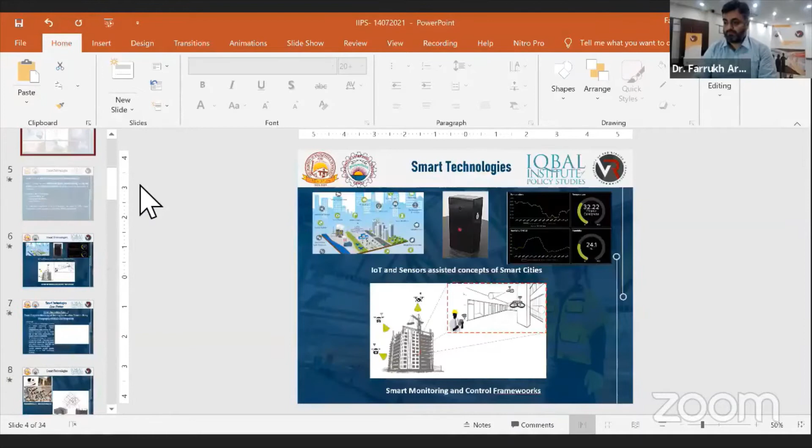This is a small brief outline of what I'm going to discuss today. I'm not here to teach, because I assume much of our audience is pretty much aware of what we mean by disruptive technologies. But I specifically focus on my title, which is smart and immersive technologies in case of disruptive technologies, and their scope or future dimensions in the construction industry of Pakistan.

Primarily, what I'm going to discuss is all those things which we have already done or are under development through different R&D projects and industrial projects. So I will briefly talk about disruptive technologies, then smart technologies, and then a few case studies we have conducted with respect to application of smart technologies, immersive technologies and their application, and a little bit of framework guidelines, much of which Dr. Lodi and General Harun have already discussed in their introduction. So when we talk about disruptive technology, this idea is driven from disruptive innovation.

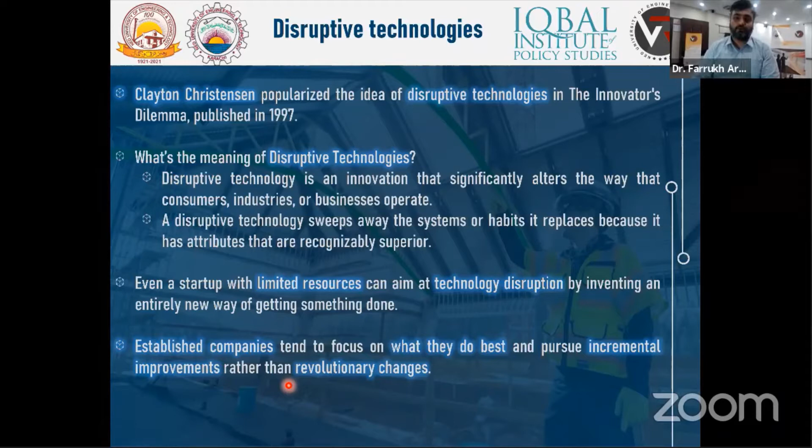Now, that has resulted in revolutionary changes in the market. And that is why we see the rise of ICT and the use of ICT in general, and in particular, sharing-based mechanisms all around the world, whether it be construction industry or any other industry.

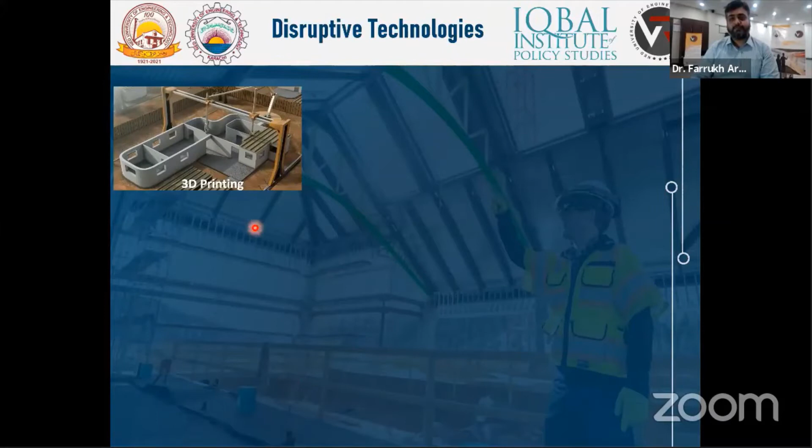Sharing, by sharing I mean sharing information, of course. Typically, the disruptive technologies, if we relate those to construction industry, the ones that are classified, there are nine or ten different technologies which are classified as being disruptive technologies for construction industry, starting with 3D printing, virtual reality, robotics and automation, artificial intelligence, because whatever data you collect, you need to process it to minimize the errors. So artificial intelligence, machine learning, use of drones or UAVs, unmanned aerial systems or aerial vehicles, 5G technology, which is already incorporated in many countries who have developed it advancedly, like US, China, but it would be at our doorstep, it's almost at our doorstep as well.

Cybersecurity development. So when you work in IoT, when you work in ICT, a lot of cybersecurity issues also arise. And hence, to cope up with those issues, there have been significant development in cybersecurity as well. Augmented reality and IoT applications, as I discussed. So these nine technologies are typically classified or categorized as being the disruptive technologies when it comes to construction business or construction industry.

Now, when we specifically talk about smart technologies, which is one part of my presentation today, the word smart is typically termed as self-monitoring, analysis, and reporting technology. So anything that ensures self-monitoring, any technology rather that ensures self-monitoring, that enables analysis by the data that is collected through that self-monitoring, and also reports, and even further, when you integrate that with artificial intelligence, providing you with solutions, would be termed as smart technology.

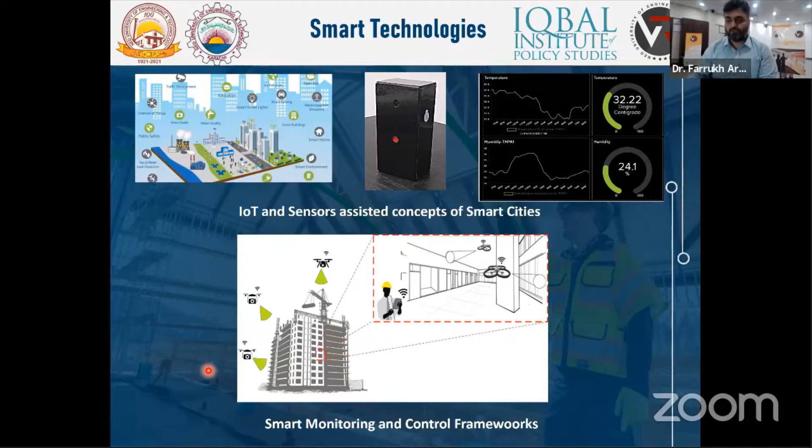Now, let us go through the first case study. This is one of our projects, already published work, in which we developed smart progress monitoring of building construction elements using an integration of videography, MATLAB for data processing and training of data, and BIM, building information modeling integration. Now, the concept was that although there are different technologies available for smart monitoring, like laser scanning, like drones, sometimes these technologies may have a wider cost impact on construction companies, and hence they may refrain from adopting such a change.

It's not that the industry or professionals might not be open to change, but when it comes down to the adaptation of such technologies, its cost side, and its human resource capability development side, they may refrain from it, and might look for traditional ways or low cost mechanisms. It is very important that when you introduce disruptive technologies into any industry, specifically in developing countries and developing industries like Pakistan, cost is one of the biggest arguments to justify acquiring or developing a technology, since implementing it on a construction site directly relates to business profits and competitiveness in our industry, which is typically a competitive bidding based industry.

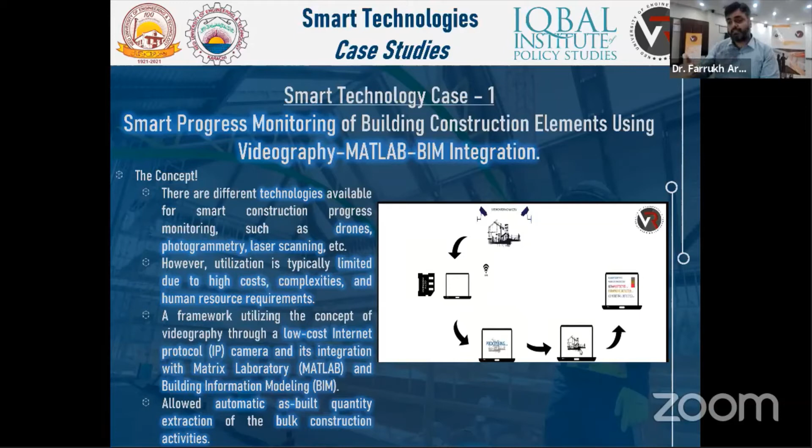So in a nutshell, the integrated framework works like this: the camera provides feeds that are transmitted to our workstations at a lab, and those feeds are processed through the MATLAB integration to provide progress reports as well as phase detection of what has happened. So it provides better visualization and better progress monitoring.

So if we move on, for example, this is a case that we implemented at one of the academic buildings at NED University. We worked with a single camera, a simple IP camera available at very cheap cost, maybe between 3,000 to 5,000 rupees, even cheaper. This 360 camera is installed on site at this location. You have to calibrate the site, of course, for the elements that are to be monitored.

We basically monitored 3 elements that included the vertical member, that is column, beams, and block masonry. We call them bulk activities. The camera is installed, calibration for the camera and its pixels is done, and then accordingly, if you look at the plan, this is the whole building plan. We marked and calibrated the grids with the already developed as-planned BIM model.

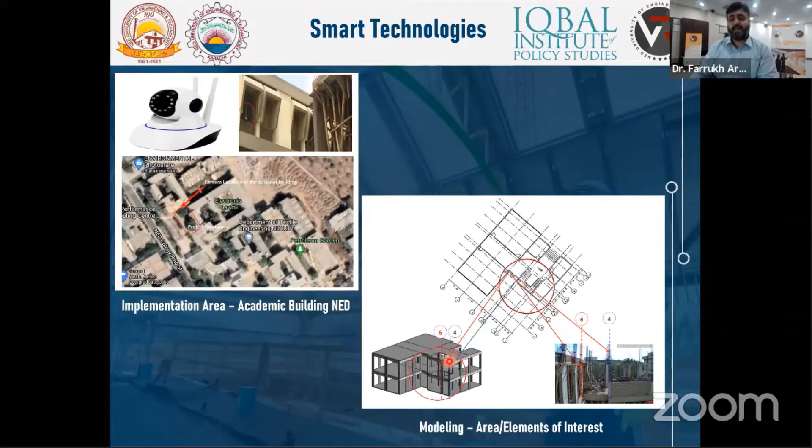Once that is developed, this MATLAB interface is designed where the live feed could be incorporated, and the live feed comes in the form of either a picture or video, and accordingly that live feed automatically starts giving us phase detection in the form of colors. So yellow, blue, and green basically reflect different elements such as formwork with respect to its color coding and concreting that has been done. So it provides a visualization.

But the more important point is that we can analyze this data set by drawing different regions. For example, this picture is converted into grayscale mode. Then we basically select our region of interest, which is isolated in the analyzer from the picture that has been got through the feed, and it gives us the quantity, with respect to the calibration, of how much work has been done.

Then, because we already have an as-planned model in a building information modeling platform, we can compare what was planned with what has actually been done on the site. This provides us as-planned versus as-built volumes, and accordingly, the percentage of work that has been completed.

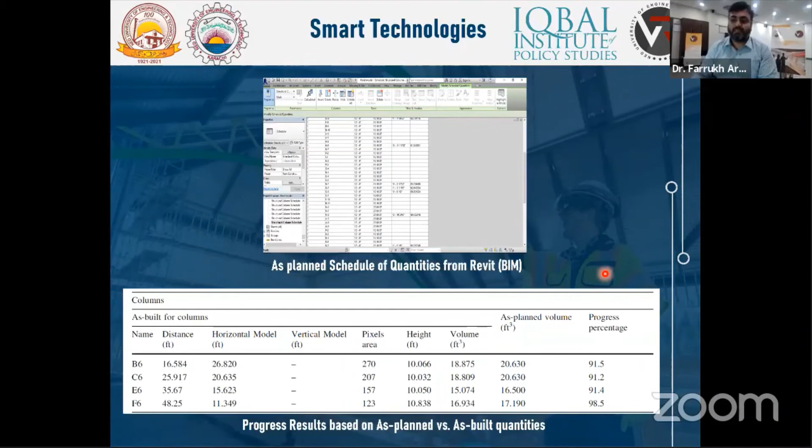The advantage of this whole system is that when we take live feed through video cameras through this IP protocol, there are lesser chances of getting erroneous data. When we get it through human resources, they might have errors or compromise on the measurements, and hence the actual progress might not have been reported. Secondly, it's a field and head office integrated framework, which provides greater flexibility in monitoring a site.

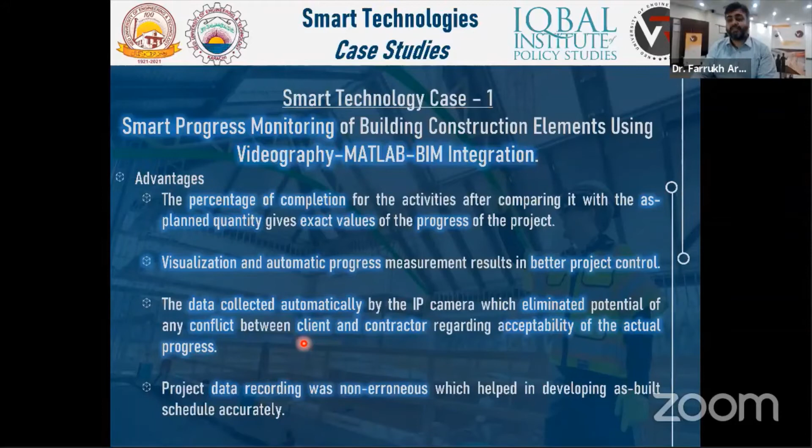The data collected through this camera is evidence-based data, so it would reduce or avoid any conflicts that may arise in the billing phase of the project. When monitoring the site, there are multiple other analyses we might be able to do. So data collection and error-free data collection is key to this technology.

Another point is that sometimes we're hindered by human resource availability or capacity to incorporate technology into our environment. So another idea was to progress-monitor with whatever human resources are available at the site. A surveyor is typically present on site, so the idea was how can we do productivity tracking of construction work using that.

What we did was utilize the already available surveyor on site and the normal total station, which could give us geodetic points. Those points could be utilized through building face surveys and for developing as-built, data-driven models in a building information modeling environment. This study was implemented at our business incubation center when it was under construction a couple of years ago, and this whole framework was applied onto that building.

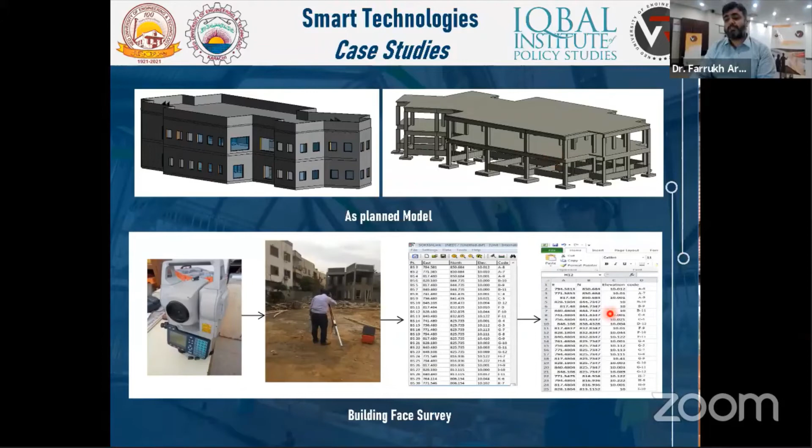The as-planned model in BIM, whether structural or architectural, was developed. Then a normal total station was used to perform a building face survey, through which geodetic coordinates were gathered, and CSV files were produced. These files were uploaded to the cloud from the site, which isn't an issue nowadays with Wi-Fi technology.

The cloud-based data was then programmed for generating data-driven as-built models through Python programming, supported by different packages in BIM platforms. You can see there are progressive updates for columns, slabs, and block masonry - the bulk activities for the building. These progressive updates provide the as-built model in Revit using the surveyed data, which was transformed through the cloud.

So survey-cloud-BIM integration, with the advent of cloud technology and Wi-Fi availability, can very accurately transform raw survey data - which were just numbers a few years ago - into a data-driven 3D model. For example, this is a whole building, and you can generate the whole building's as-built model in 3D as well, and with that the data could be analyzed for productivity tracking.

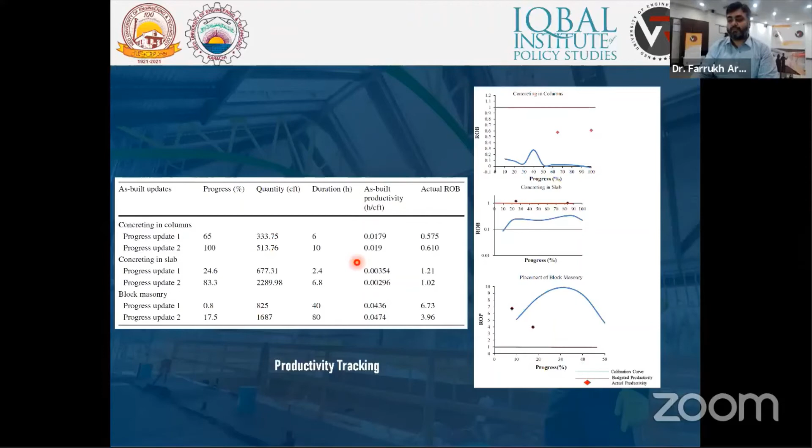These are certain productivity curves. This blue curve shows typical industry productivity data for concreting of slabs. According to our planning, the red line shows the productivity benchmark in the graph, and we can monitor productivity data by taking the schedule of quantities from BIM for the data-driven models generated, comparing it with the as-planned model that was already there.

This technology would not require small to medium-sized construction companies to incorporate a lot of new things onto their sites or into their office. What they need is human resource training, but the simple surveyor already on site can now provide a lot of valuable data, which can be utilized for monitoring the progress of the construction project.

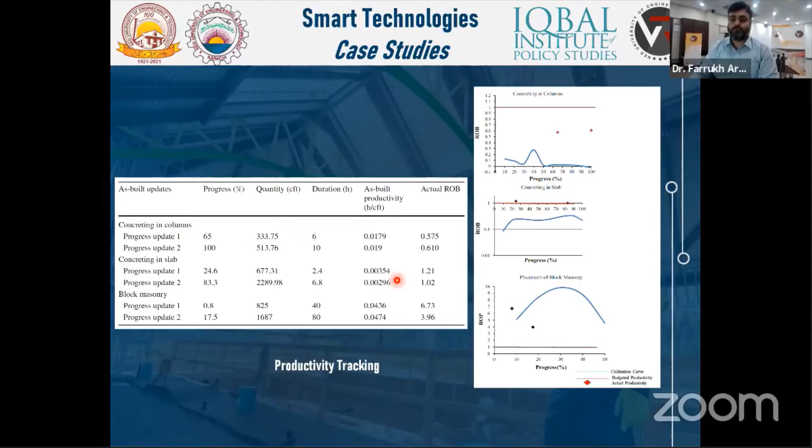Now, advantages - as I already discussed, one thing I'd like to mention quickly is IoT based. We're working on a project funded through HEC, in which we're developing guidelines for energy efficient housing. What we understood was that it's not just about having the bill data - energy bills data, electricity, water and gas - to analyze. Simulation alone is not enough either.

We need to incorporate the habits of the people living in that house. For that reason, we designed certain sensors which monitor different energy performance aspects of a house. We incorporate these sensors into the house for 15 to 30 days, from where we get live data in the form of graphs and charts, which we analyze and compare with simulation results. This incorporates what we call the living lab concept, utilizing IoT sensors that provide data to the cloud, which we analyze to improve the energy performance of a house, incorporating the habits specific to buildings currently in use. This is one of the key areas of disruptive technology in the construction industry.

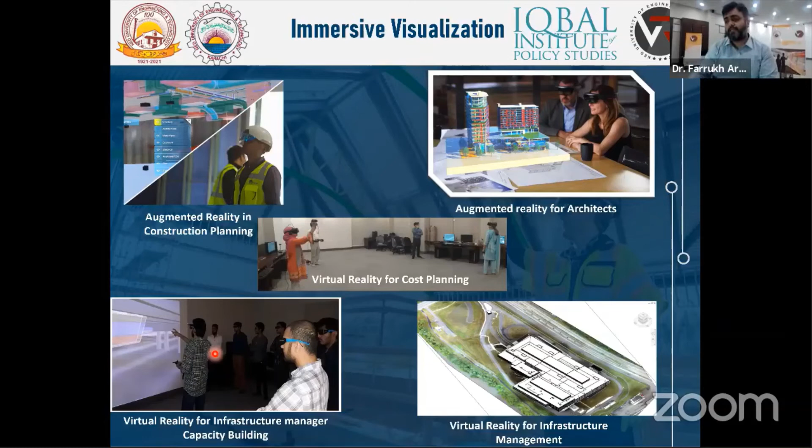Let me quickly go through what we have done. This is one project we did with an American company, in which we integrated drone-based data with laser scanning data, and integrated this visualization with the BIM model into virtual reality. We presented it to CTDOT, this project was in Connecticut. The whole framework was this. We worked with AI Engineers USA on this project, who took our help in developing the integrated visualization. The basic idea is that drone-based data, laser scanning data, and building information modeling data provide different dimensions to an infrastructure facility.

If we can integrate those into virtual reality, it can help us with better visualization, better as-built model generation, better decision making, and inspection in the future. For example, this was a Connecticut Waterbury bus storage area, almost 400,000 square feet, a 2-story facility on 30 acres. The AI Engineers were responsible for planning, monitoring, and management of this project.

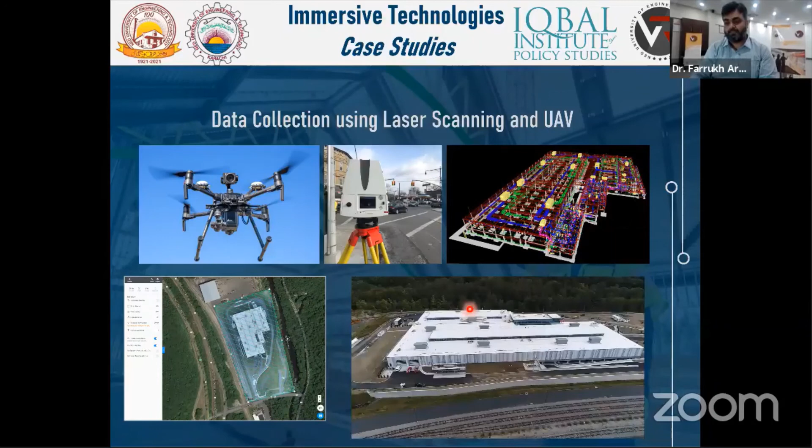Our partners utilized drones, they are very well versed, and laser scanning data to generate different models. You see this drone video at the bottom, reflecting one of the flights. There are many routines in utilizing UAV-based data collection, and then laser scanning data was collected.

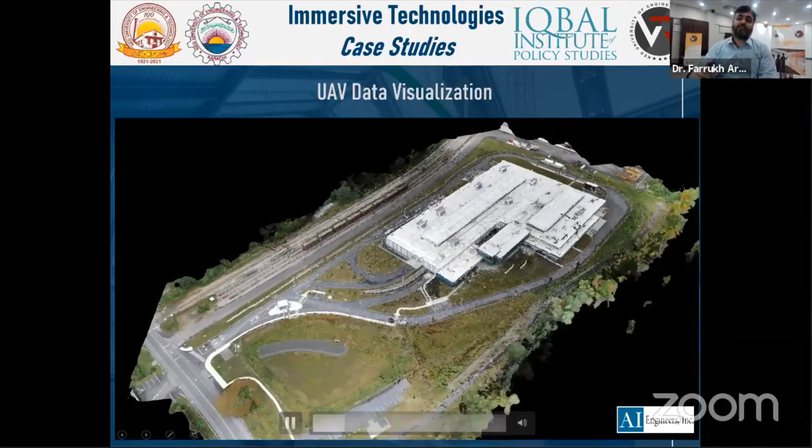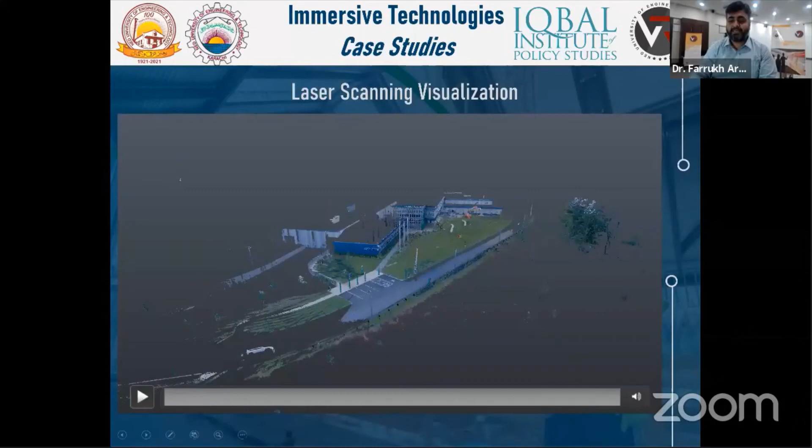This is the laser scan model of the same facility, you can see the accuracy of laser scanning. This is the UAV visualization, and a number of point cloud data was generated out of the UAV data collection using drones. Thereafter, laser scanning was performed mainly to look at the inside of the building or the detailed features, and this is the laser scan data model for that facility.

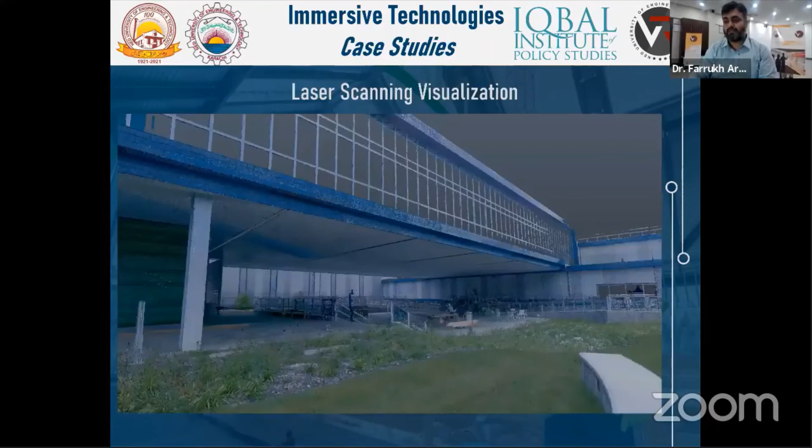After this, we had the data set in terms of drawings for the as-planned model, so we developed the BIM model as well, the as-planned model. Now we had three data sets: BIM-based data visualization, UAV-based data visualization, and laser scanning-based data visualization. Laser scanning is very good for as-built.

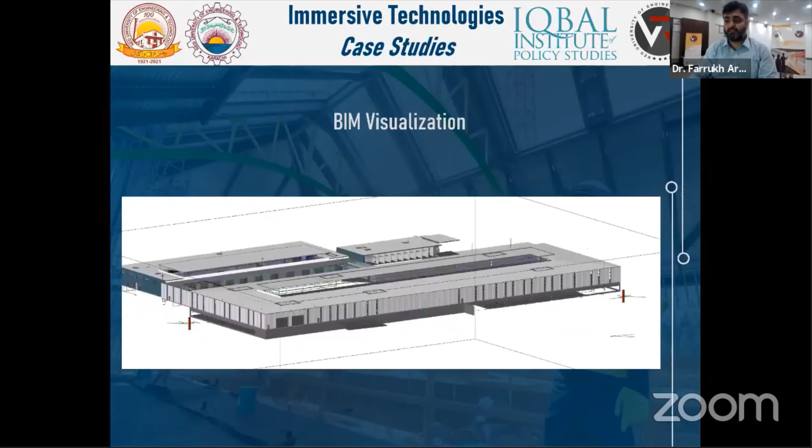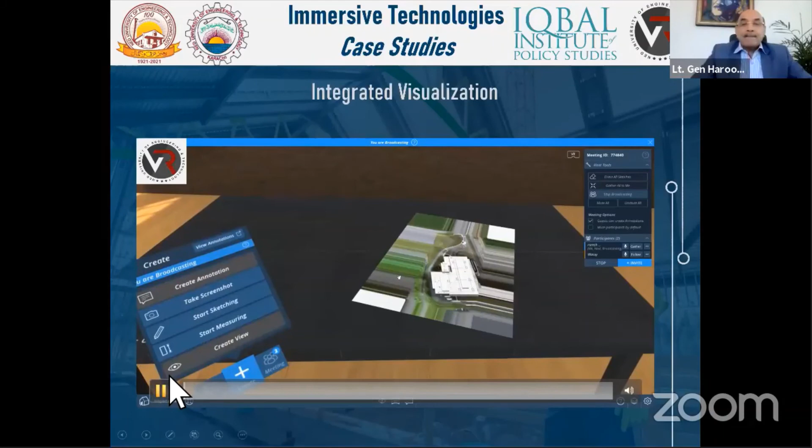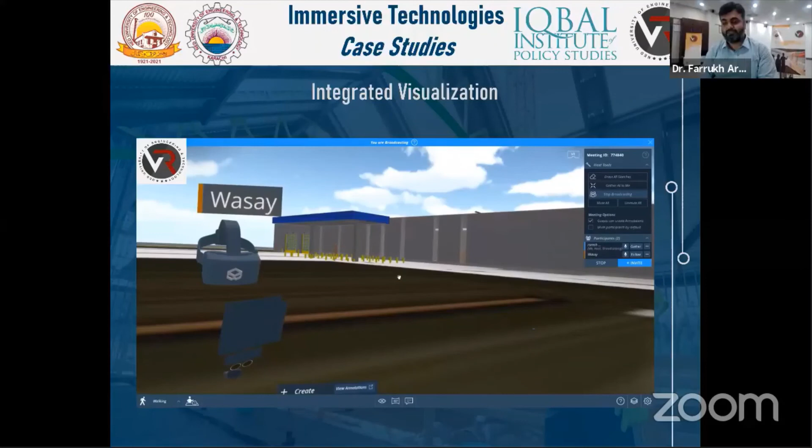So what we did was we were able to integrate it for integrated visualization as well as decision making. This is a screen recording of one of the sessions. I wish I could have shown you it in virtual or augmented reality. But you can see that measurements could be done of the site. The outside of the site was UAV-based data, and decisions could be made in this model in virtual reality. At the moment, two personnel were integrated, talking about different decision parameters and measuring.

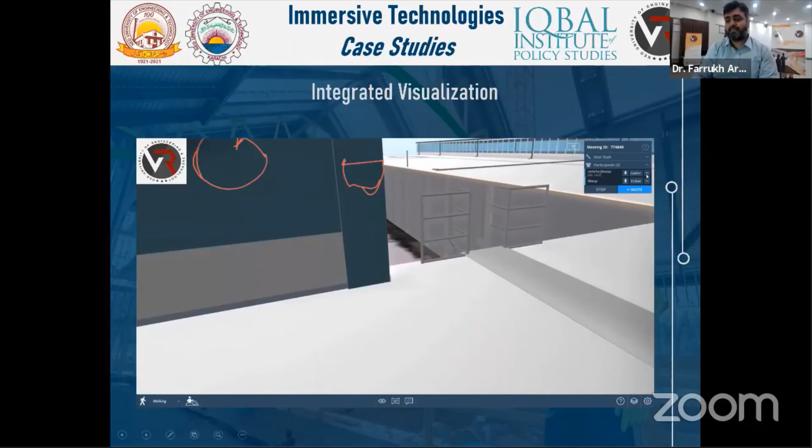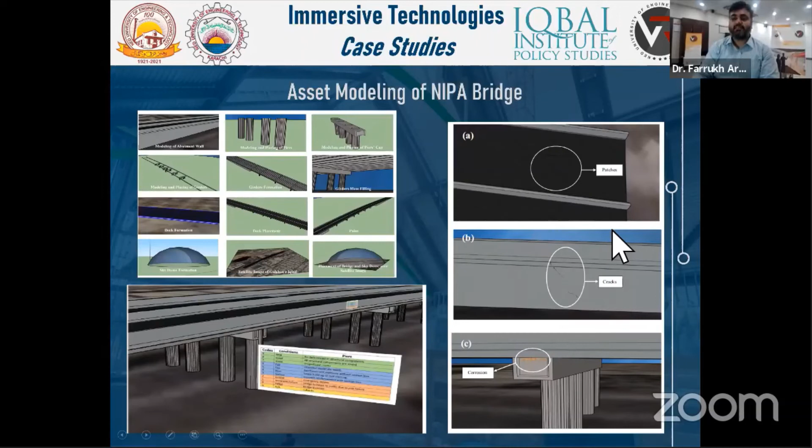Another thing was that we utilized virtual reality for capacity building, which was a main point for engineers. So what we did was we developed a model of the NIPA Bridge, very famous in Karachi at NIPA Chowrangi, in virtual reality and 3D. We developed an as-built model, as well as certain cracks and physical deterioration parameters for training purposes for the engineers.

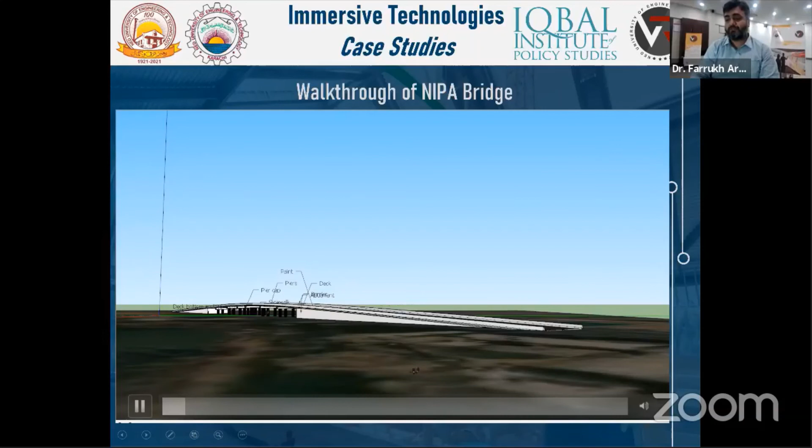Once the model was developed, it was geodetically placed in the area of NIPA, utilizing Google images and GIS. Then the model was tested on a number of engineers through test sessions, and the data was analyzed for their comfort level. Overall, the feeling of the system, the use of VR gadgets, and the overall comfort in visualization was rated very high by the engineers, showing that virtual reality could provide decision makers with better visualization for infrastructure management and decision making.

Finally, very quickly, I don't need to stress on this, but what we need to do is incorporate capacity building for having disruptive technologies incorporated into the construction industry. We need indigenous solutions - we cannot just adopt solutions from outside. We need to develop indigenous solutions which are cost effective and which could be implemented using limited resources.

We need R&D investments, which was highlighted by General Harun - sometimes we refrain from having substantial R&D investments. Generally speaking, we need a linkage between industry and academia, in which industry becomes a solution seeker while academia becomes a solution provider, because the R&D environment has more opportunities in academia. Adaptability towards innovation and disruptive innovation should be increased through awareness sessions like these.

And finally, curriculum update - Dr. Lodi already talked about it - but I would stress one important point: when it comes to policy implementation, knowledgeable, open-minded, open-hearted, innovative, and R&D-oriented minds should also be incorporated into explicit roles of decision makers, whether positioned at policy-making organizations or regulatory agencies. Because at the end of the day, incorporating a technology into an industry would require regulatory changes and policy decisions. For that, we need the right people in the right positions.

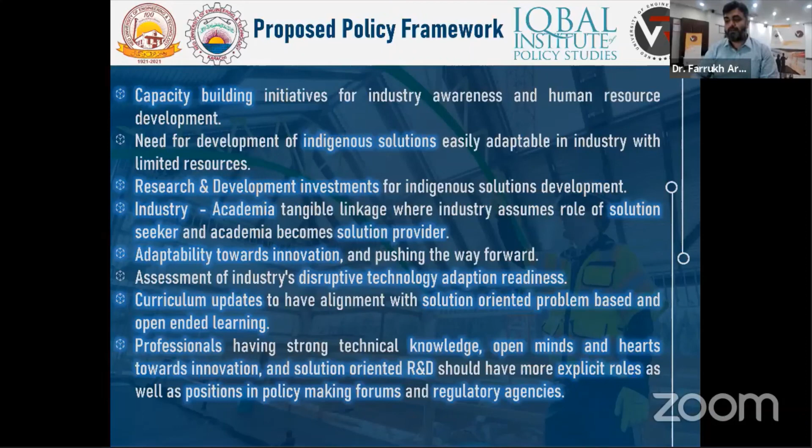My apologies for taking a little bit more time. Thank you very much, I'll be open to any questions later.

Thank you very much, Doctor. A very comprehensive presentation, particularly your case studies. You talked about self-monitoring, analysis, and reporting technology - frankly, I didn't know, I thought smart just meant smart as an English word. So this is knowledge to a layman like myself. You also talked about the case study of smart progress monitoring using videography, MATLAB, and BIM integration, and you covered real-time productivity monitoring, energy efficiency assessment, with your high point being the proposed policy framework.

We will include this in our report, which will go at the appropriate level, inshallah. The key point of your presentation, which touched my heart, was that you require people with technical knowledge but with open minds and hearts. So this is the connectivity of technological knowledge with hearts and minds also. Wonderful, sir.